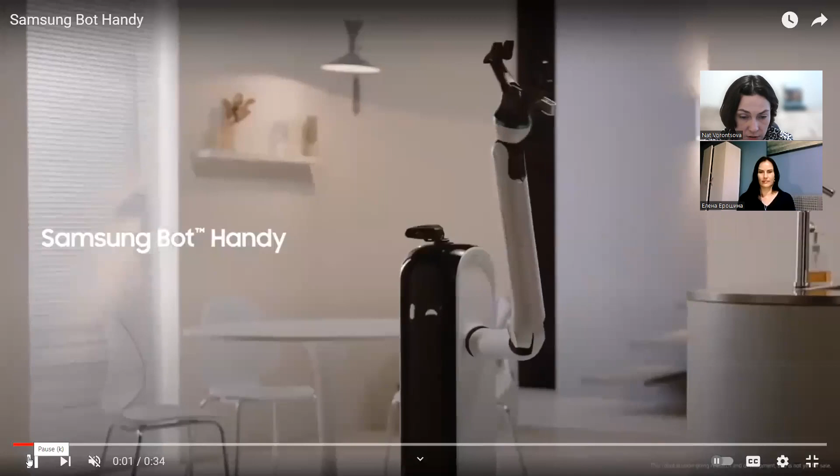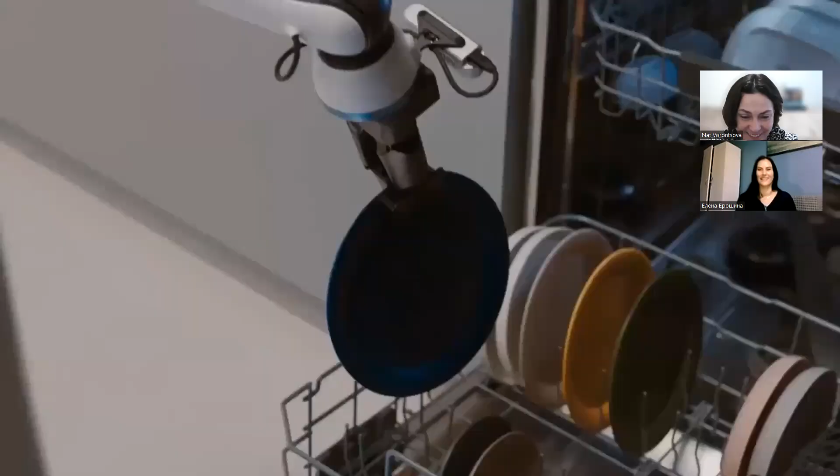It's not cooking as far as I see, but it can serve your table, put stuff into the dishwasher and wash the dishes, and pour you some wine or beer - which I probably can do myself. I can pour my own beer. That's the main thing, but it's sad that it doesn't cook.

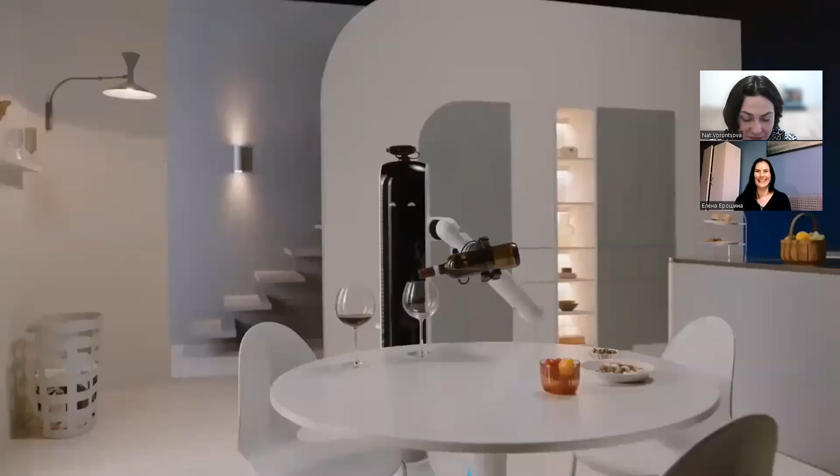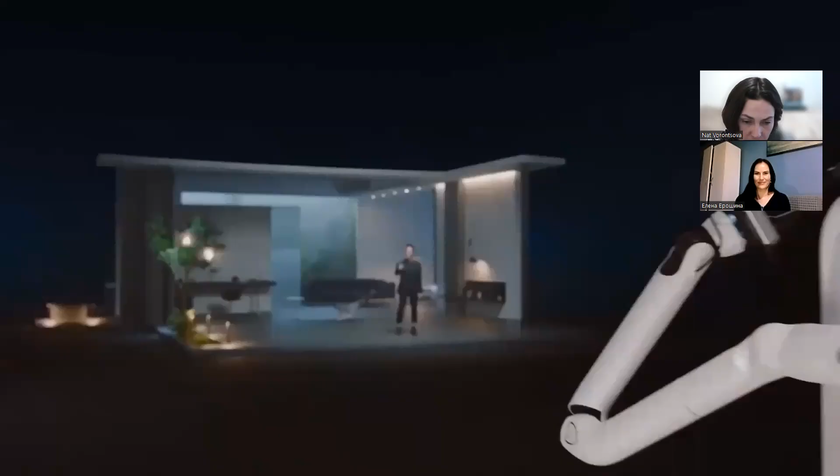I don't know how much of it is actually autonomous - it's more like some sort of animation. I don't think that's really where they are right now. There isn't much information about this robot, and the last news was like two years ago, so I'm not quite sure if they're even developing it further.

One of the things I find really annoying about all the robots we have now in the market and in research is that they all use either hydraulic, pneumatic actuators, or motors like servos and stepper motors. All of these things are extremely noisy - they're buzzing, they're humming, they make noise.

I don't want to listen to buzzing in my house after work. Yeah, it's really, really annoying. And just think about it - if it's just one motor buzzing, but each of these robots has multiple motors, maybe like 10 of them, and motors pumping air if it's pneumatic, or liquid. So that's one of the disadvantages, and all the stepper motors and servos have their limitations in many different ways.

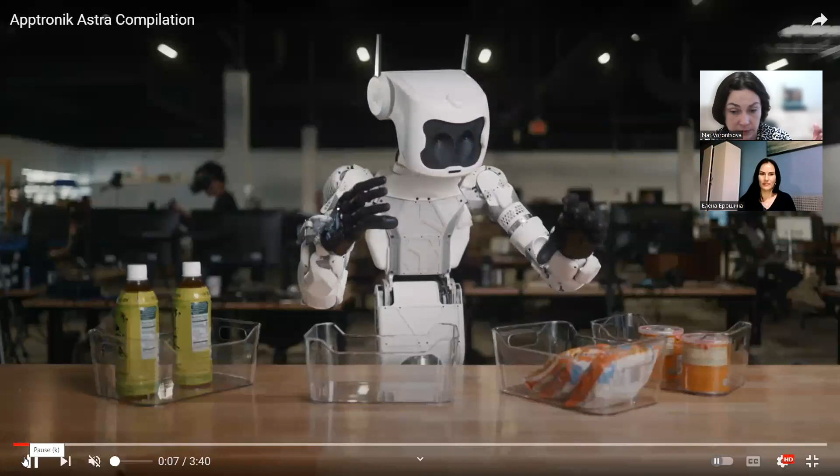So I want to show you this robot, which seems to be pretty silent. I don't have sound right now, but you can watch it later - the links will be in the description. We'll put all links in the information box below the video, so you can see this video by yourself.

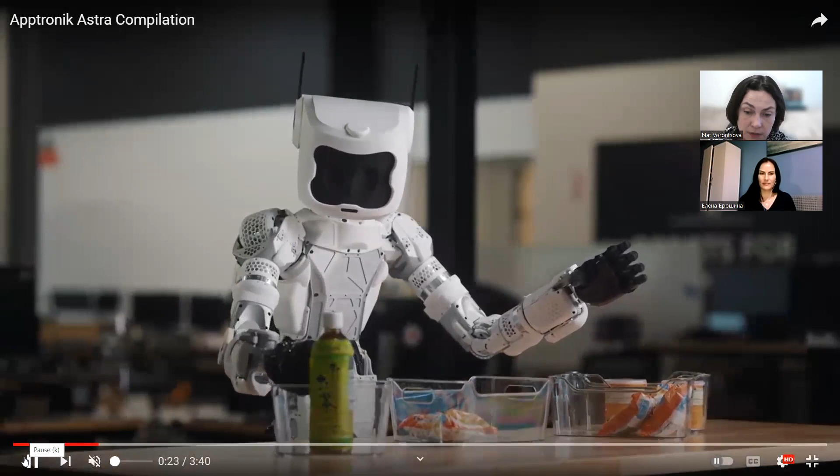This robot - I think they did it on purpose - they're taking these crinkly bags of food so you can actually hear the robot doing it, because the motors are not that noisy. If you watch other videos of robots, you'll see they always put music over it, because these robots are actually pretty noisy and they want to hide it.

This robot is working, it's a live video, and you can hear this robot actually performing duties, and you can hear how it's doing it. At first, I was really fascinated.

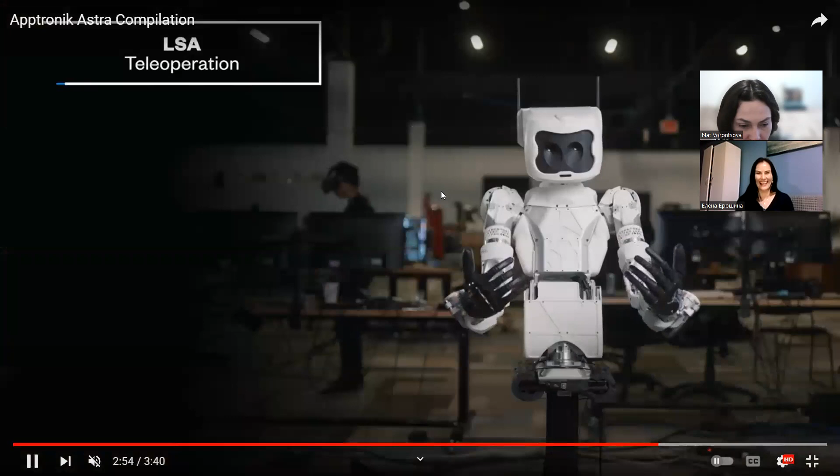I was like, oh my God, this is so perfect. You can almost feel intelligence in this robot. How are they doing it, right? But there is a big disappointment at the end, because this robot is not by any means autonomous. It's operated by a human. That's why you feel this intelligence behind it, because you can see that this robot is staring at this box like, what should I do?

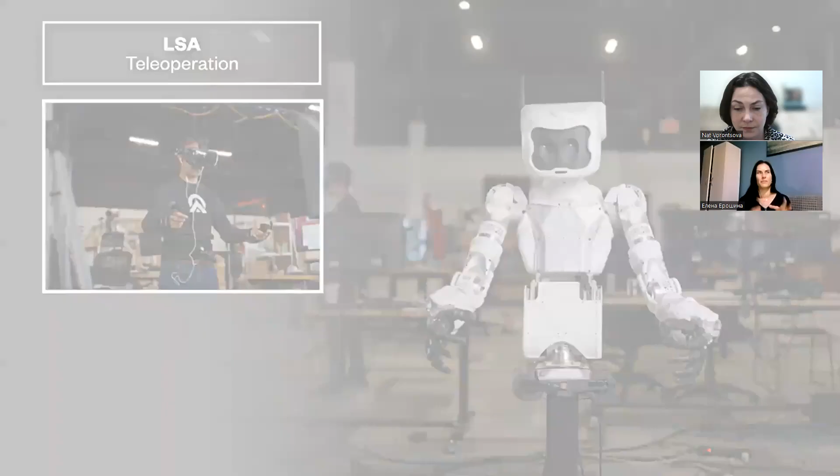Because it's good for different applications, but if it's in space, not for us. Or in some sort of toxic environment where people cannot go and you need to do some fine hand movements. Generally speaking, we don't need a humanoid robot. I think we should have something cheap and simple that can be easily put into production.

And easy to make with not much resources. So yes, we don't need all these fingers, right? We don't need it to be human-like. It's like basically, if we think about old times, when people were trying to make a vehicle that would move faster than a horse, be better than a horse, they didn't make another mechanical horse. They did something different, because it's really hard to replicate a biological system. They're too complex. So our robot should be something, I don't know, looking like a bucket.

I think like R2D2 from Star Wars. Yes, I think it was a great idea. Some manipulators will be sticking out of it, grabbing things. They are basically like R2D2. So I think it was a great idea in Star Wars.

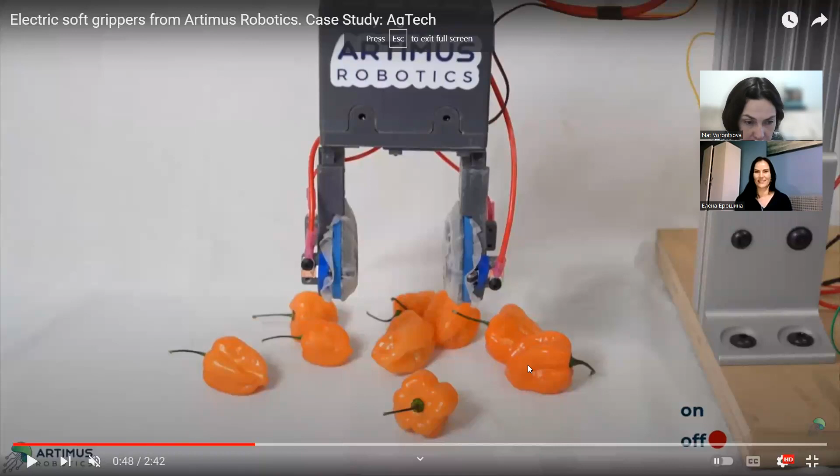The most interesting part is coming right now. I found this robot. It's not a robot yet, it's just a concept that is being developed by Artimus Robotics.

So it's very important to take fruits and vegetables. Our robot can take it, prepare and cook it. So I think it's an important thing for us. Yes, I think it's very important also because we don't need a robot with much power, kind of like industrial robots that can lift heavy things, like have much torque to turn something or squeeze something. We need very delicate motions.

So this robot is just being developed. I would say that they are developing artificial muscle, sort of artificial muscle, which is based on electrostatic. So it's kind of a mix of electrostatic power and hydraulics. Again, the link will be in the description.

One of the interesting things about this concept is that it can sense itself. So it's not only grabbing something, but also it can sense what it's doing, right? Because again, if you're talking about hands, like a biological system, we don't need additional sensors for this robot because it has another construction. Basically it's very hard to make a gripper with sensors because it's all moving parts, flexible parts. In this case, the gripper is a sensor at the same time.

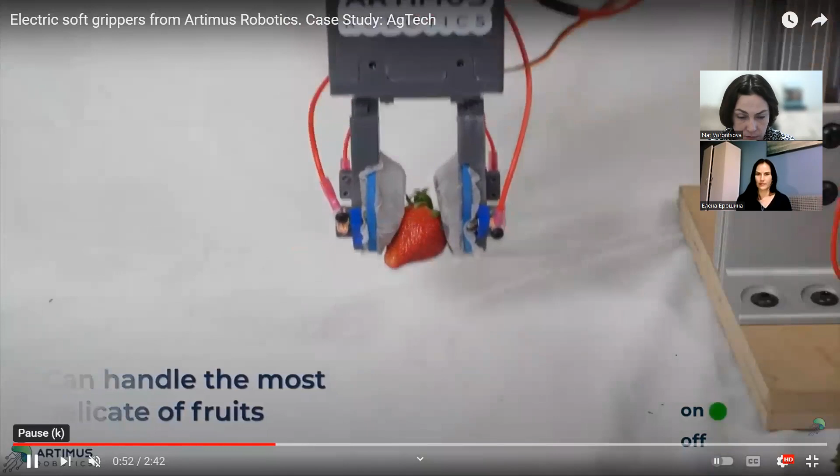It can take various objects, so we will have a range of measurements, and we can train the models to recognize and take it accurately. So basically, how it's done.

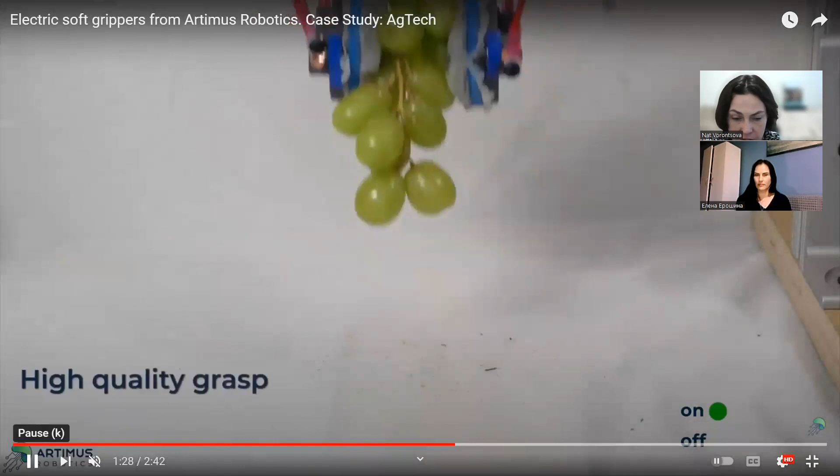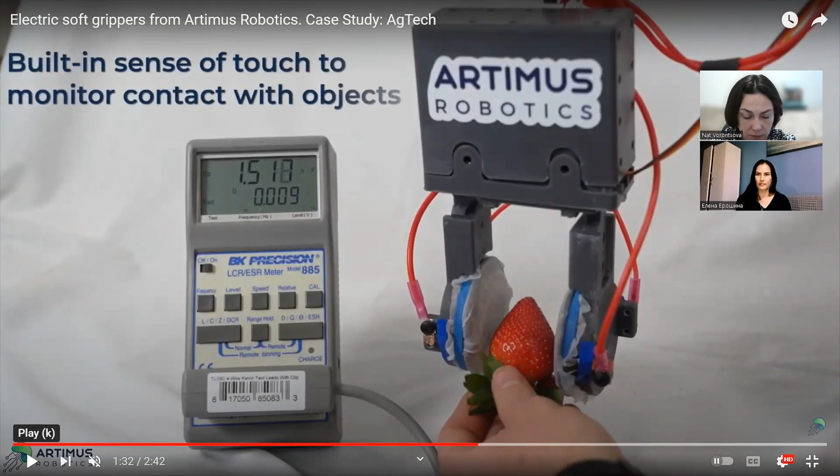So these artificial muscles are variable capacitors. You can see how the shape is changing, right? You can see here, it's an LCR meter, which is basically an impedance meter. Impedance is like resistance in an electrical circuit, but it's the capacitance of these muscles, which are basically variable capacitors.

We can measure capacitance in real time, and depending on what this robot is gripping, the waveform will be different. Now, in this case, it's not a waveform, but we can turn it into a waveform on a screen, and we can analyze it with artificial intelligence, and we can make a robot with feedback that will be grabbing and holding objects.

I think we have to try to make it and try to train the model, take these things, I think. Yes, I think it's possible. I think it's possible, and maybe it's the first thing we should do. Maybe, yes, maybe we should go this way.

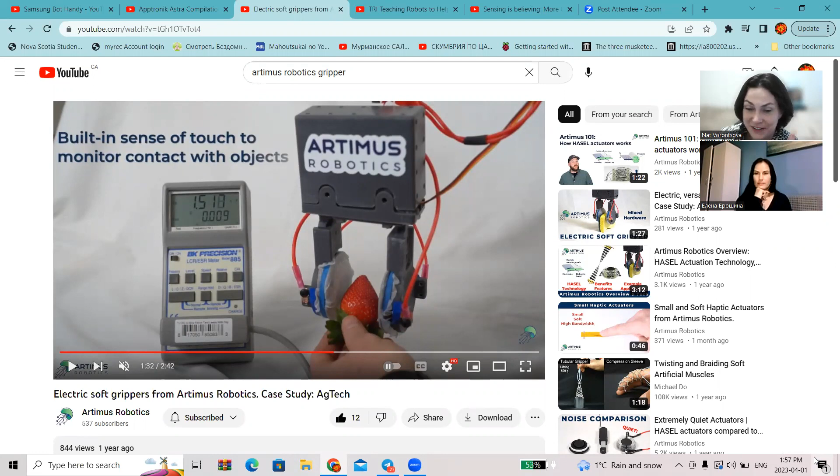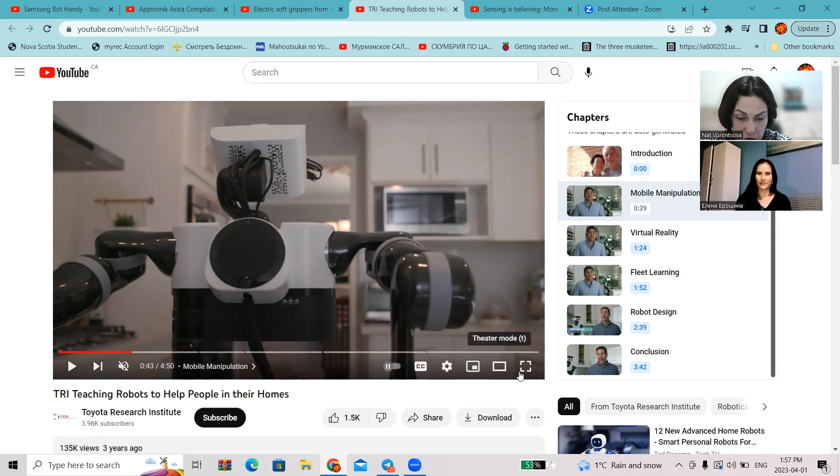There is another way, like the last video I want to show you. Again, it's Toyota. The closest to what we want to do is produced by Toyota Research Institute. Again, this thing is not cooking, but cleaning. At least they are making attempts to make it. Nobody wants to cook, even robots. Even robots, can you imagine?

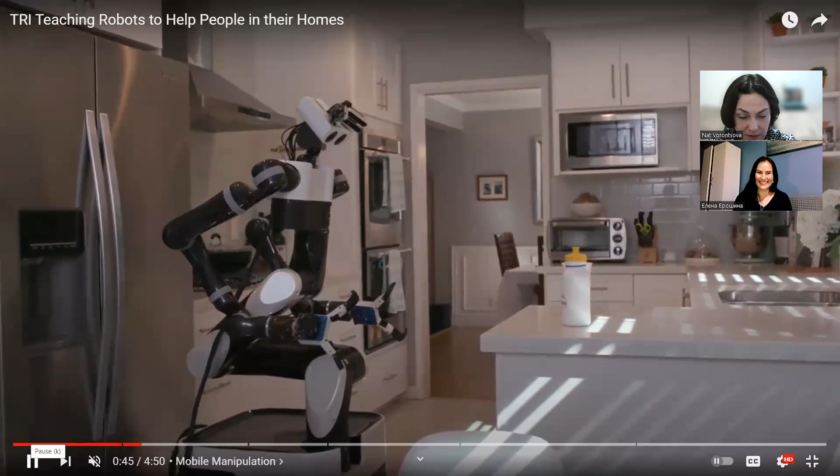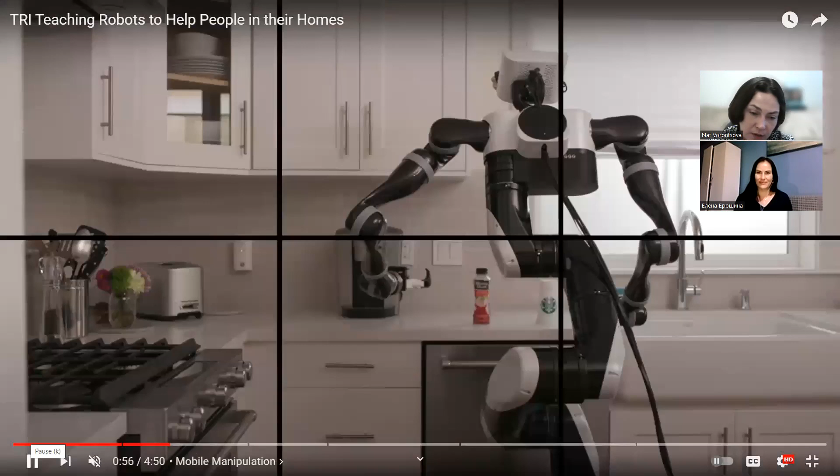So, yeah, this is a pretty sophisticated robot that can go around your house and pick up things, take things from cupboards and drawers, take things from the fridge. As you can see, it's also using the camera inside the fridge to navigate.

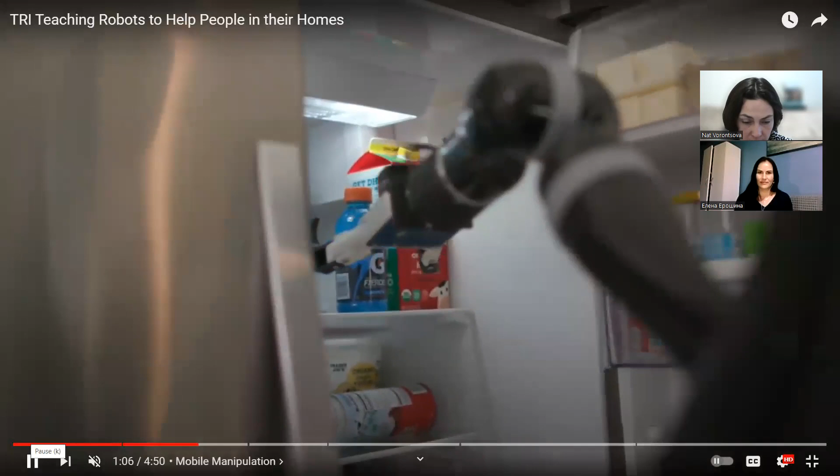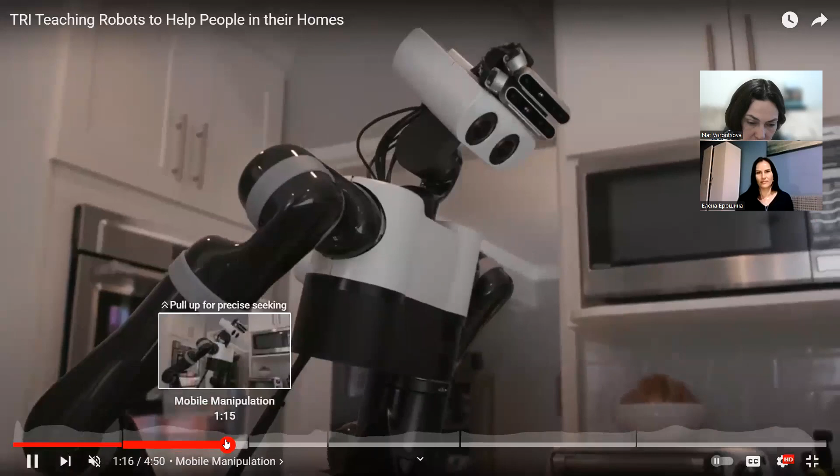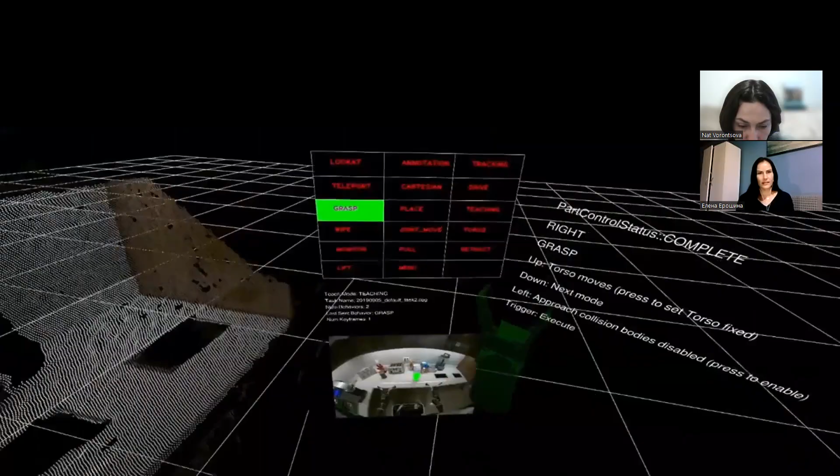But this robot is, of course, using very expensive technologies that Toyota is using for this research. One of them is LIDAR, like a laser radar. They're pretty expensive, and also they use it in VR, as you can see. So this is an image from LIDAR, and humans are teaching this robot in a VR environment to grab things.

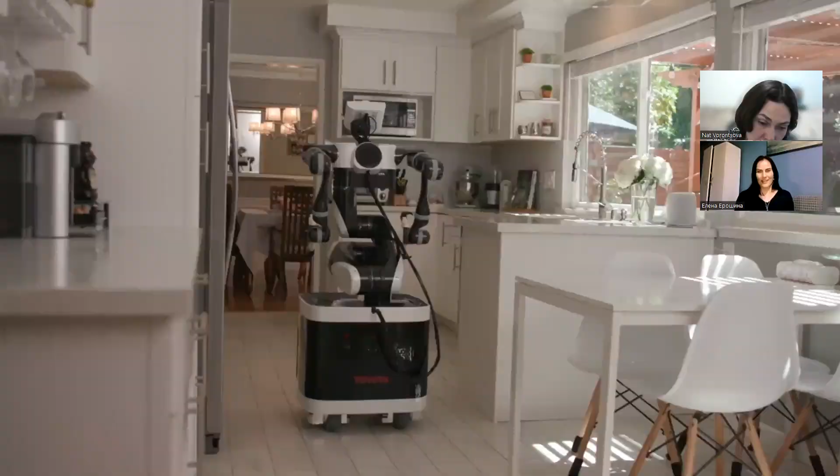Of course, it's a wonderful opportunity, but I don't think we can do it. This robot will be pretty expensive with all of this, so we need something more simple, I think. But I like this manipulator, it looks good, but I'm not sure if it has self-sensing.

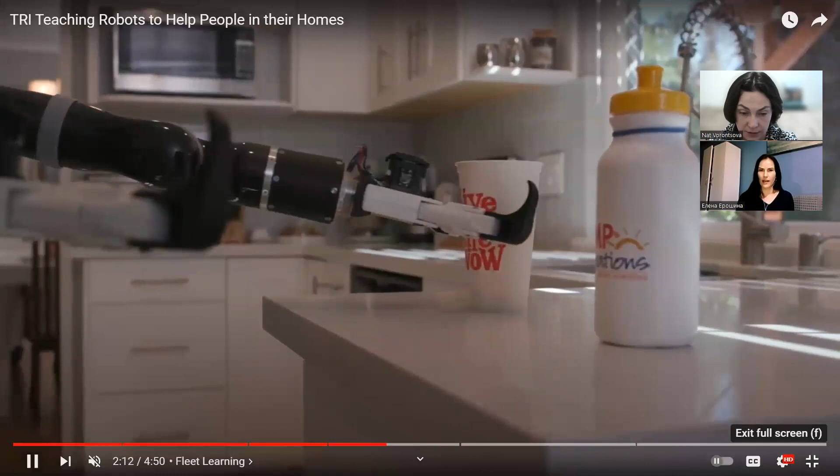I don't know how to say it in English. I don't think it has, or maybe it does have sensors, I'm not sure. But what is interesting, right now Toyota is developing another robotic claw, another robotic gripper manipulator that has self-sensing pads.

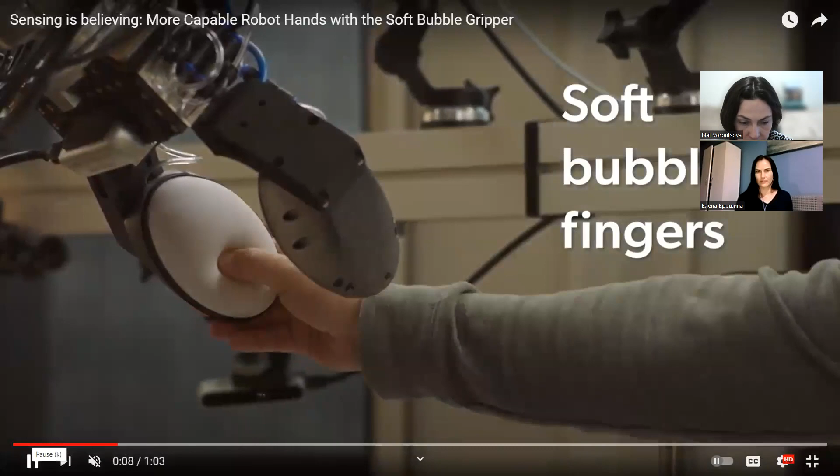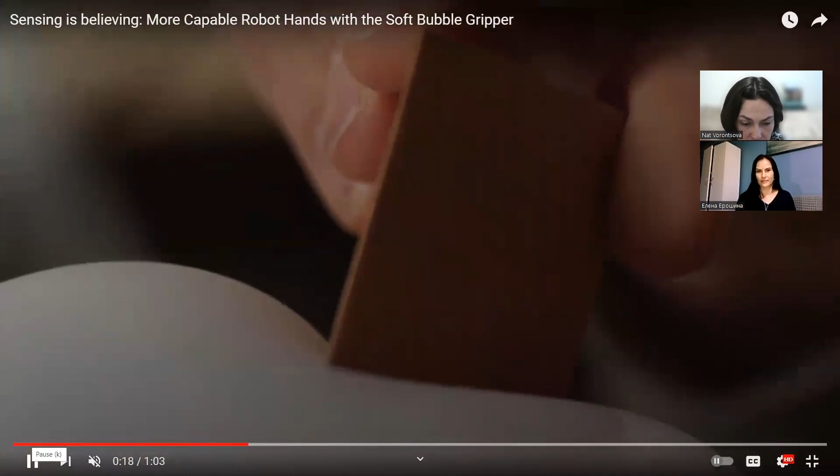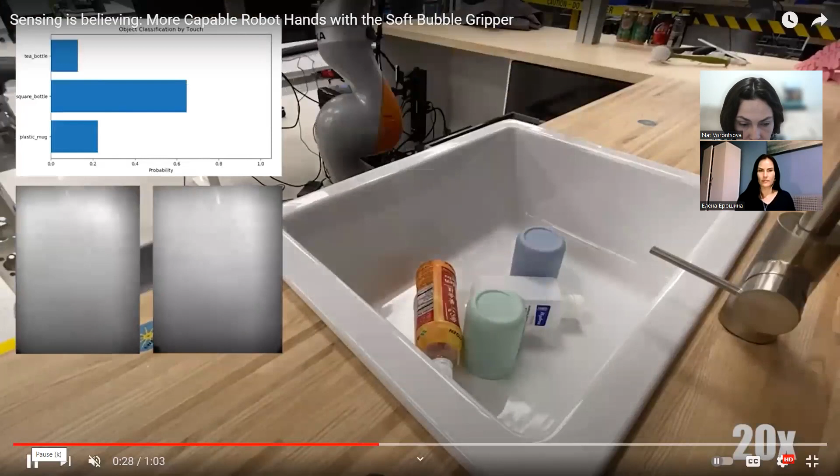It's kind of similar to what I showed before from Artimus Robotics, but they use what they call HASEL actuators, so electrostatic actuators. This one is pneumatic, so it's using air to pump it up. You can see there are dots on the surface from the inside, and displacement of these dots is being monitored by a camera or maybe multiple cameras.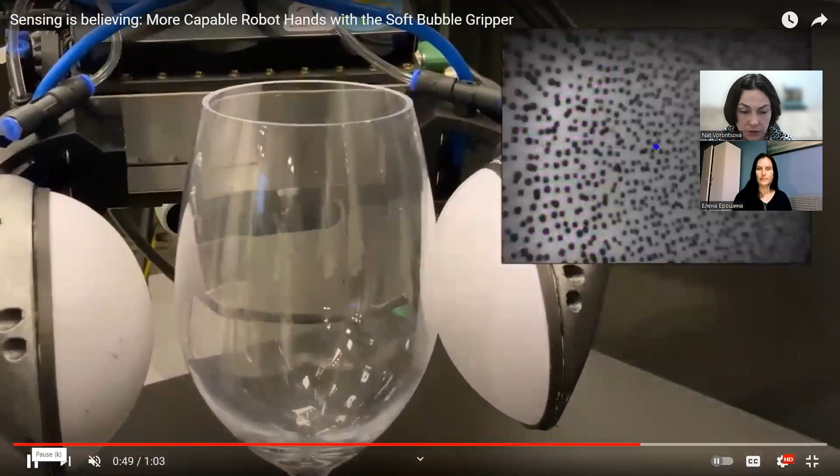So this way they are creating self-sensing capabilities. It's a different robot, but again, what is interesting is they are open source. They want people to help them develop this robot. All the resources are open access, so we can study how it's done, and make our own and try to train it. I think it's pretty amazing.

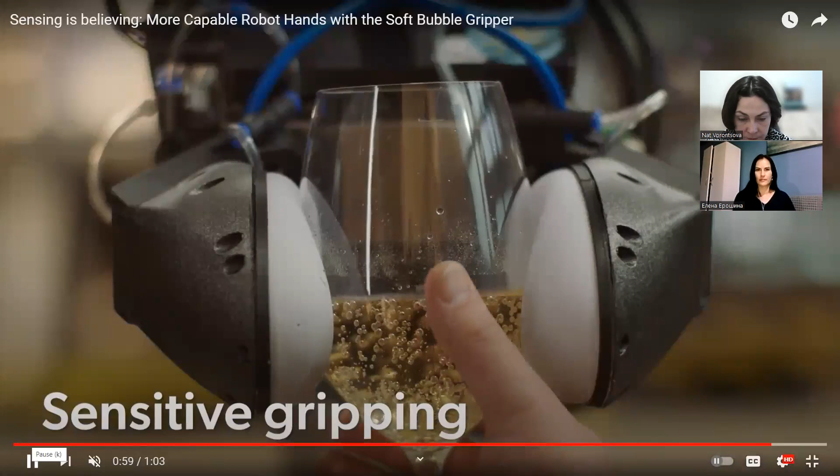Again, it's going to be noisy though, it's pneumatic, and the motor will be pumping. Do you think it's really noisy? I don't know, we should try. So I see two, basically the same concept of self-sensing robots, but using two different technologies: one is electrostatic and one is pneumatic.

As a data scientist, I want to note that it's a great job not only for engineers but for data scientists too. We need to develop many neural networks in different fields, and we need to use NLP for conversation, and computer vision for object detection and recognition, many things to do. We need so much time to do it, but I really want to because it's very interesting.

I think it's helpful for many people who live alone or who can't serve themselves because of illness or something else. Many people live alone, that's one thing. Many people don't live alone but still don't like to cook or clean. I don't think it matters if you're alone or not. If you're not alone, there's more mess, and no one wants to clean this mess.